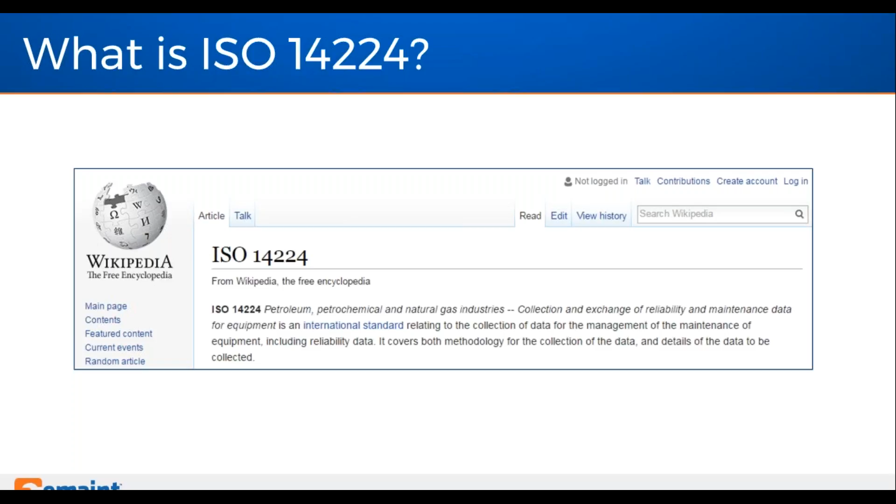The phraseology is taken from - even if we go to look at Wikipedia, we'll look at some of the terms that influence the implementation of a CMMS and the data in relation to it. So the messages even Wikipedia have to say about this: the collection and exchange of reliability and maintenance data for equipment. I'm not going to get too hung up on the fact that it came from the petrochemical and gas industries - this particular standard is most certainly applicable across all industries, particularly all industries where a CMMS comes into play and can be used.

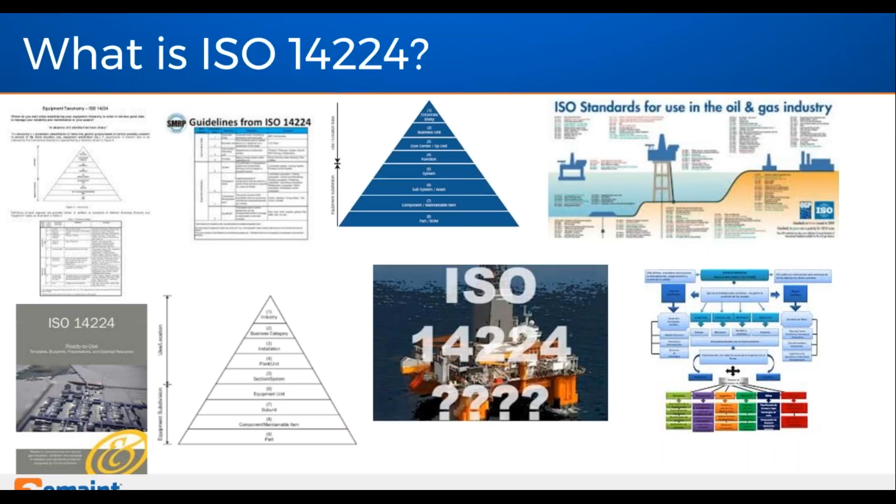A quick search in Google presents us with these sort of illustrations. You can certainly see an oil rig in the middle there, and certainly influences coming from the oil and gas industry. Also there we can see triangles - there's 3 or 4 on this particular slide. So what's with all the triangles? We'll have a little bit of a look at what the triangles mean a little bit later on in the webinar, we'll go into it in just a little bit of detail. But it's the one illustration from ISO 14224 that really assists, particularly in relation to the setup of the data.

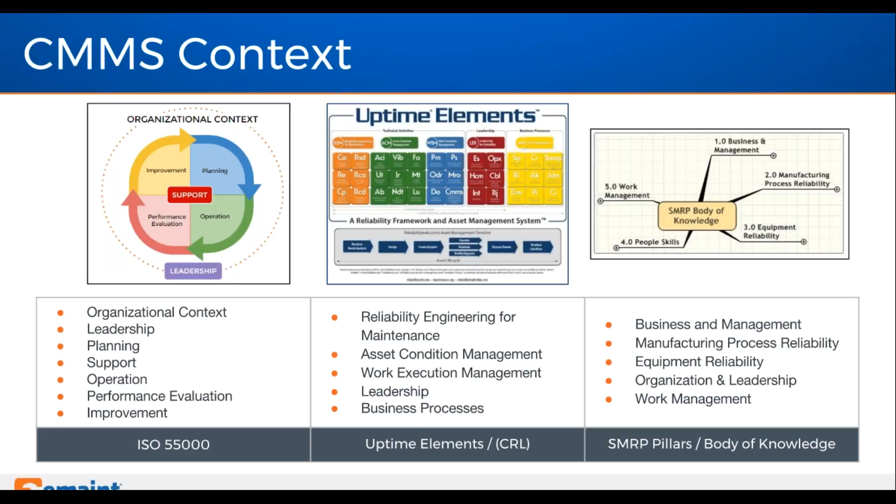Within the ISO 55000 standard, there's a clear section around asset setup. It's section 6 within the standard that specifically refers to setting up of asset information and so on, and the value of asset information. So it might be something to have a look at if you're on the ISO 55000 journey.

In relation to uptime elements, the Uptime Elements illustration has changed recently. However, what I would say is that there are numerous elements here within this particular illustration where ISO 14224 can play in. Certainly in the middle there in the blue, where we've got CMMS, that's certainly a place where ISO 14224 plays in. OpEx in the leadership space, in the green space there, the area around even vibration analysis, and in the orange there on the left-hand side, topics around root cause analysis and failure analysis are certainly areas that 14224 can play in.

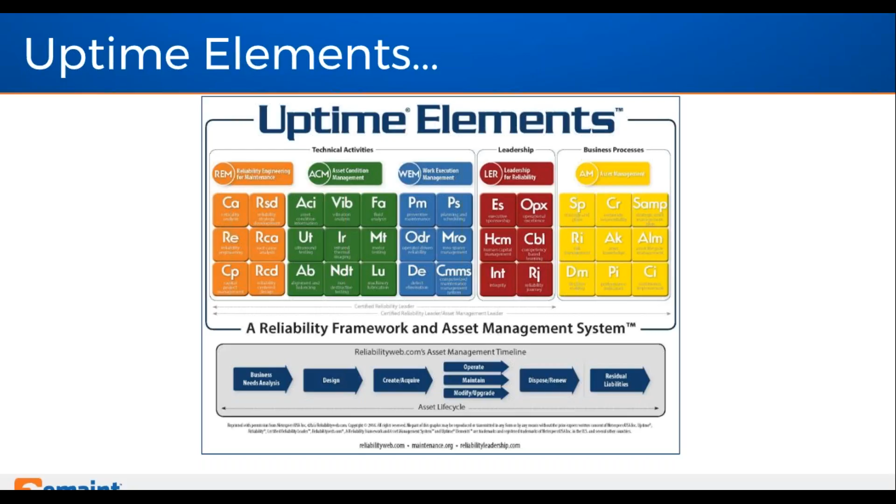Quick note on SMRP and EFNMS, the European Federation of National Maintenance Societies. So Pillar 3 in the SMRP world around equipment reliability is where the key touch point is here between SMRP and 14224. The bullet points outlined there are going to be very similar to some of the items we're going to see later on in this webinar, particularly in relation to KPIs, calculations, and reporting. So the sort of reports, the sort of KPIs we'd expect to see out of a system like eMaint and a CMMS are the sort of topics that we're going to be touching on in one of the annexes later in this webinar.

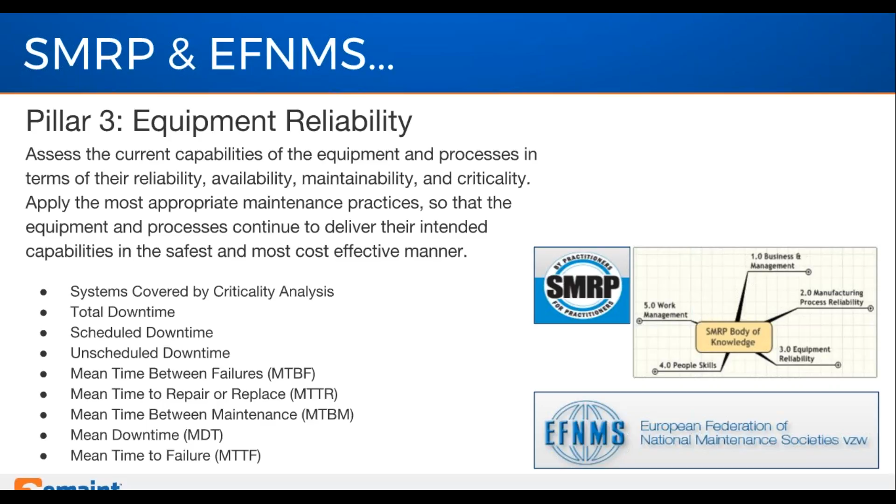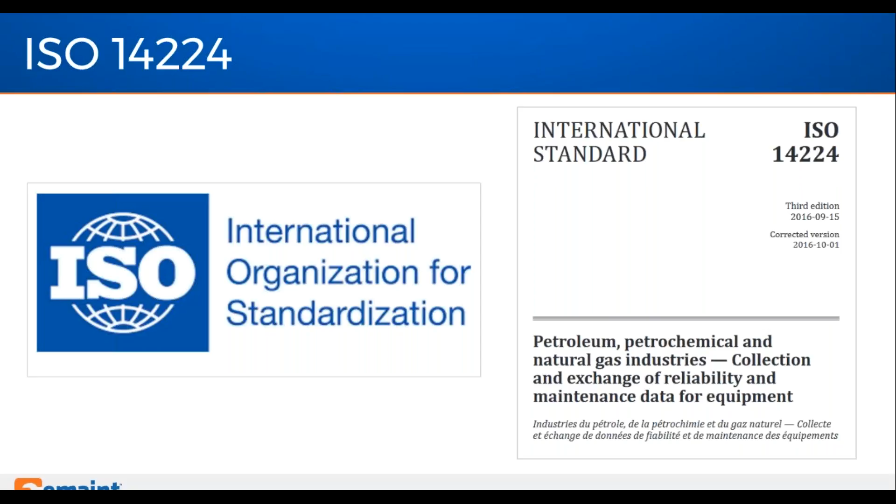So the key objectives of the standard: it's an international standard, and in the title, the collection and exchange of reliability and maintenance data for equipment. This has come from a standard that we got a hold of ourselves here, and the main point here is that it's applicable not just from the petrochemical and the gas industries. It's applicable across the board—anywhere there's a maintenance technician interacting with a CMMS, interacting with data and reliability.

The key sections of the actual standard, like most standards, I'll quickly run through them here. There's a scope up front, some references up front, key sections around terms and definitions, very useful. Similarly, the abbreviated terms section covers how the standard is applied and the benefits of reliability data and the exchange of that data.

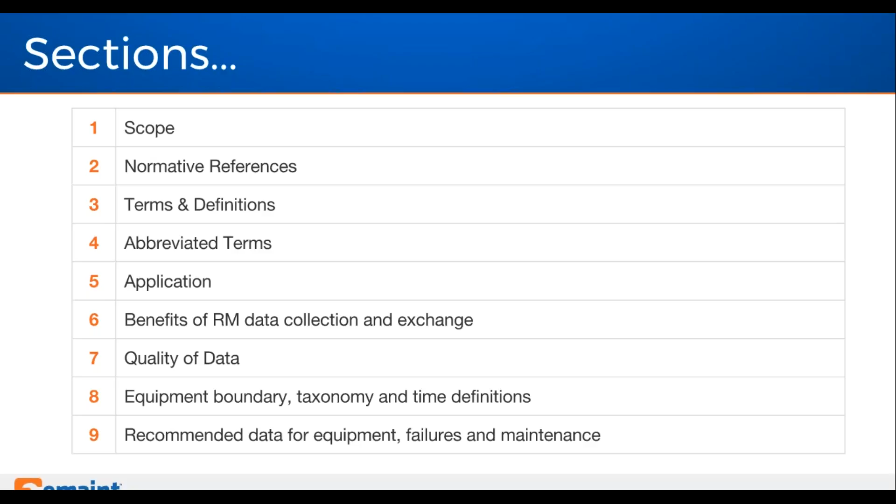Sections also on quality of data - it's a topic that is on our radar all the time. Quality data over quantity of data. Very useful sections around equipment boundaries, taxonomy, and definitions of time. We'll look at those sections in a little more detail later. And some recommendations in terms of data failure and maintenance.

As I mentioned earlier, the important pieces for me are the illustrations and the content of the various annexes within the standard. We'll look at some of them in detail - equipment classes and attributes, how we deal with failures and the maintenance parameters. We'll look at calculations and how useful they are and how there's consistency in that area. The KPIs and benchmarking and classification, particularly in relation to safety critical items too.

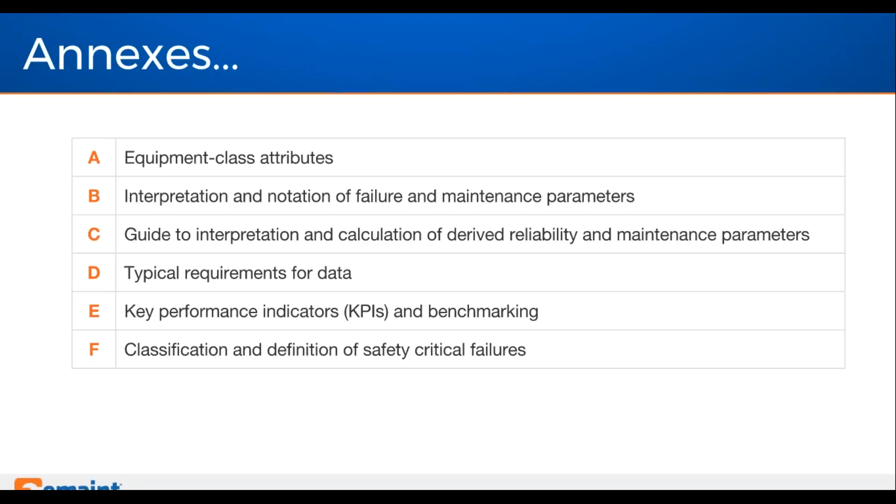The key themes that run through the standard are noted here: safety, reliability, cost. There's an emphasis on cost-effective design and maintenance, data on failures, failure mechanisms. Maintenance is important - methodologies and risk, reliability, data, the collecting of data.

Data is an investment, mentioned there second or third from the bottom. It's an investment in the success of your organization, in your facility, and in the success of your CMMS. And clarity as to the causes of failure is key to prioritizing and implementing corrective actions that result in sustainable improvements in availability, leading to improved profitability and safety.

So there are quite a few themes that run throughout the standard like that. But for me, the standardization of the data collection practices facilitates the exchange of information between relevant parties - plant owners, manufacturers, contractors, and so on throughout the world. So consistency of the data, a standardization of the data, extremely useful.

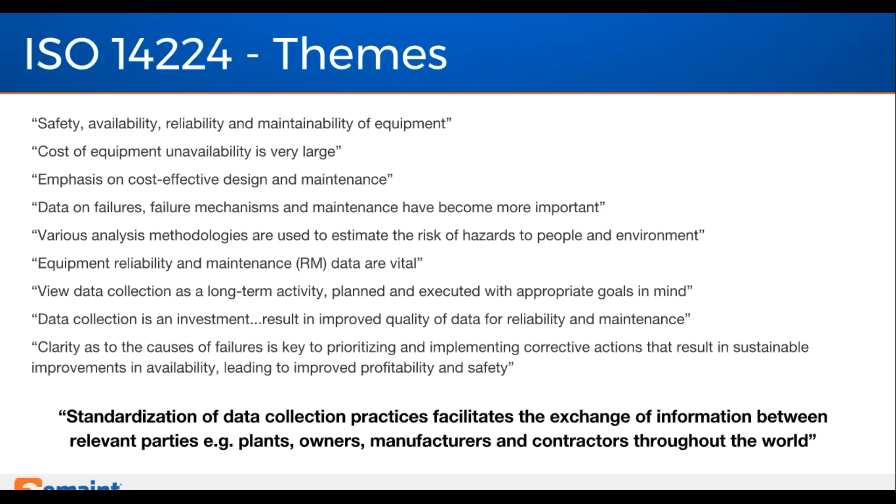What I would also say is that the standard 14224 uses a phrase called the reliability thesaurus. I like that particular term. It's such a good reference document, particularly when it comes to references and terms and phraseology that we use in our world - the world of CMMS, the world of implementing CMMS, and taking advantage of standards along the way.

Some of the items noted there in orange - it's an international standard, certainly assists as a standard format for equipment in all facilities, not just the gas and petrochemical world. Clear focus on data quality and assurance practices, and also useful in terms of the data collection practices that might come into play. We find this all of the time.

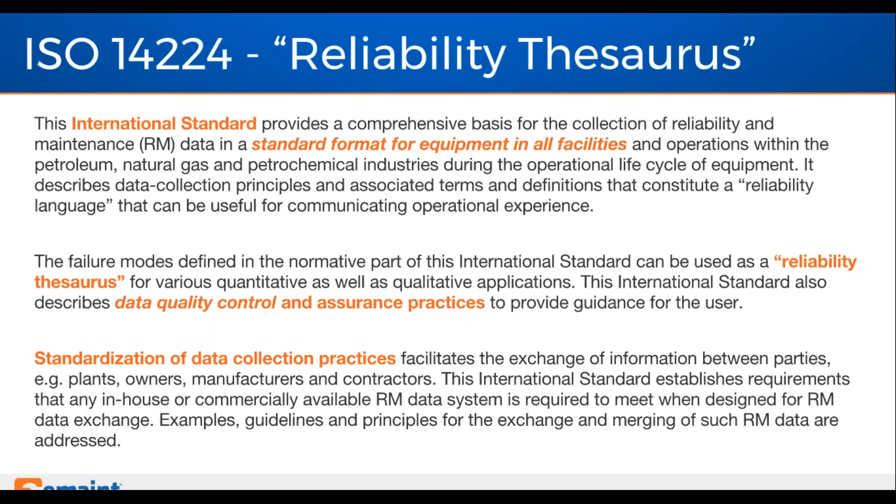One of the very first key foundation stones of a successful CMMS is the data collection phase. And standard processes in relation to that - we do our best to implement a standard process for most of our prospects and our clients.

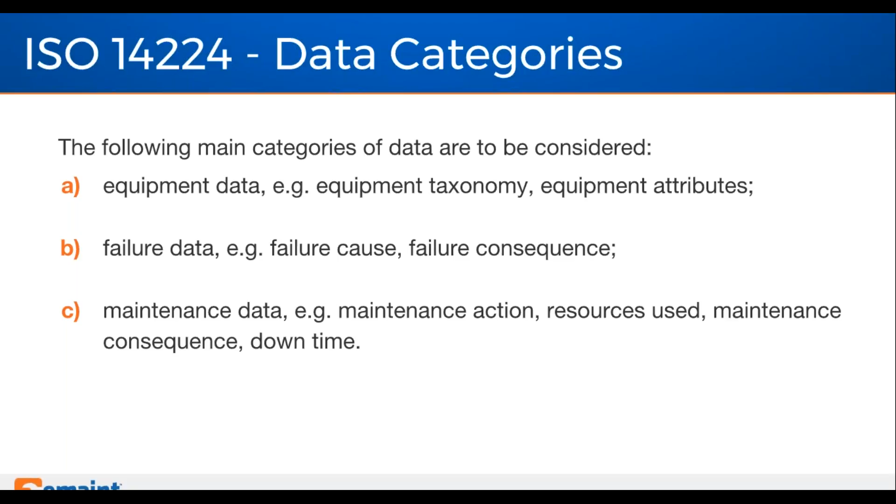Some topics within the standard around data categories - we'll have a little look at those as we go through the next few slides. But categorizing data is particularly around equipment, and there's a term there called equipment taxonomy we'll have a look at. It also looks at failure data, failure causes, failure consequences. What happens to a piece of equipment, and how can we categorize what's happening so that we can influence some decision making based on the causes of failure and the consequences of those failures.

There's a focus on data usage, focus on reliability and data used in reliability, data used in availability, data used in the terms that we use - corrective and preventive maintenance. And also a focus on safety and the environment and risk.

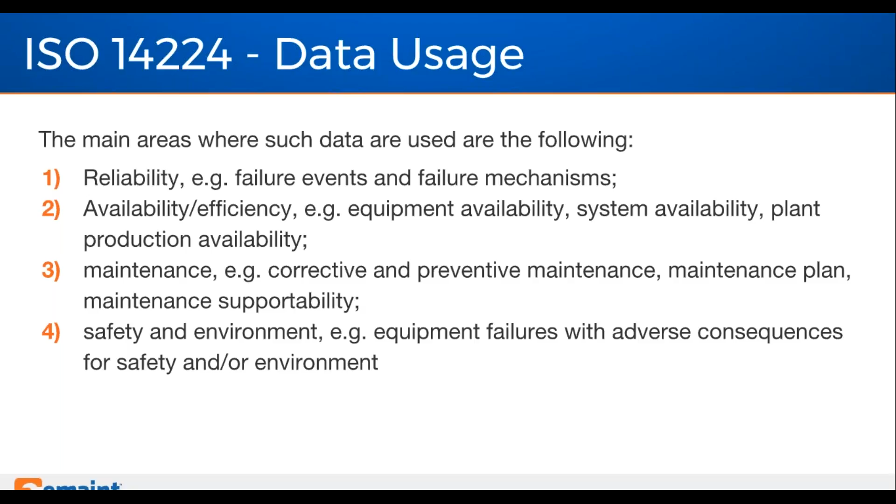Another cloud here specifically related not just to CMMS, but in this case to 14224. There are dozens, maybe hundreds of definitions in the standard that are useful - what we mean by equipment types, what we mean by a non-critical failure, what we mean by availability, what we mean by the life cycle, maybe what we mean by mean time to failure, mean time between failure. So definitions around these phrases and words that we use every day in the maintenance world, definitely very useful.

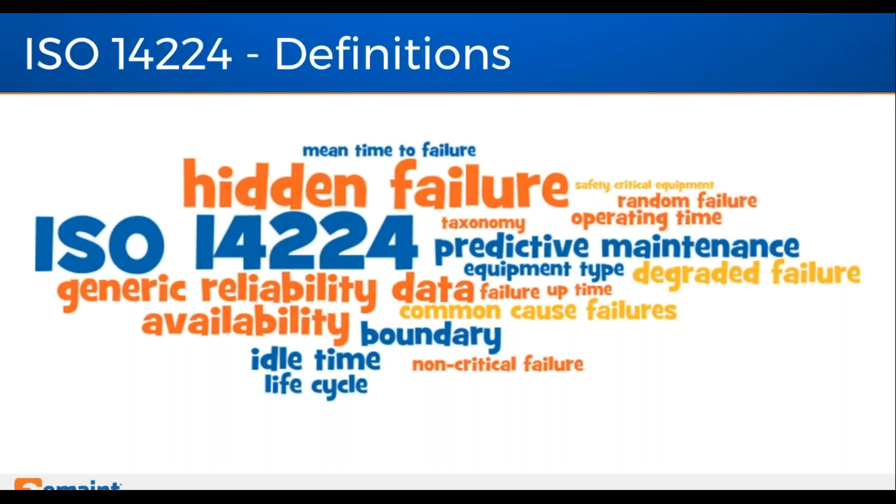So there are numerous pages in the standard that assist in describing this. So this reliability thesaurus and the common language that we want to use is certainly clearly defined in the standard.

How useful is the standard? Well, a high level list here really of where 14224 can come into play in terms of the users - those involved in the installation of plant, construction, those involved in the owning and the operating of those facilities. Industry - it's a cross-industry standard, very applicable across the board, useful for manufacturers and designers.

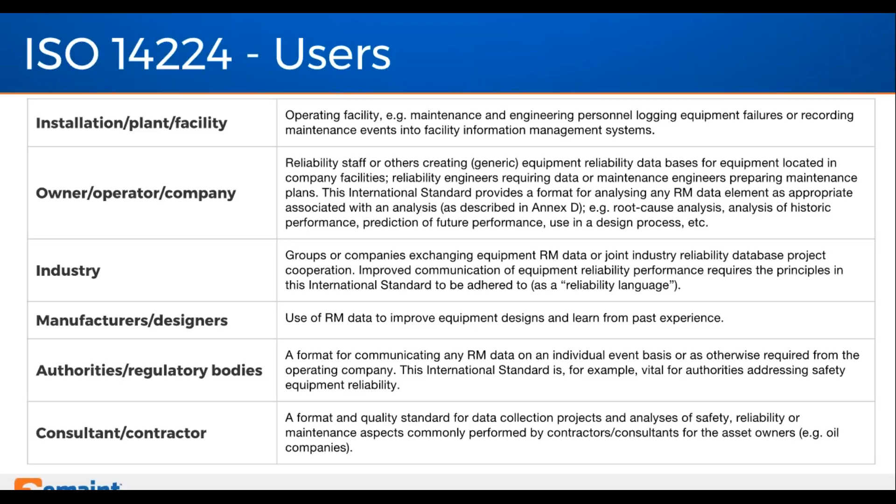You're going to see some illustrations of maybe some P&ID type illustrations as we go along here. You'll see where it comes into play for designers, particularly in the commissioning, maybe pre-construction phase of projects. Regulatory authorities and regulatory bodies find value in this as well, and contractors, consultants, folks that are involved in construction of facilities and installation ownership. So across the board, folks that interact with facilities, production, manufacturing, or otherwise - it's useful across the board.

We're going to hit a little bit later on some terms that come into play and tend to cause conflict: the topic of times, downtime, uptime, ownership of equipment when a piece of equipment is down or unavailable. There's a great document here to help us put some clarity around the different phases of downtime, which we'll look at a little later.

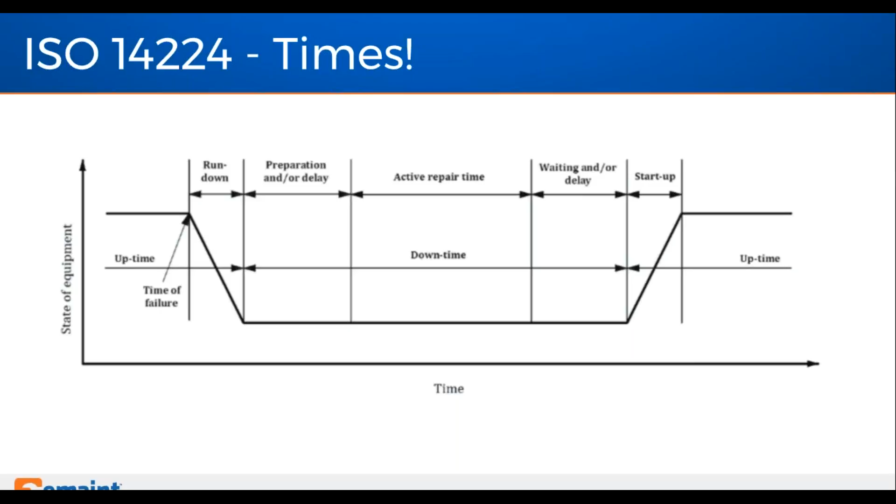So it brings us on to the topic of availability, reliability, and maintainability, which leads us to our second poll on the topic of reliability. Let me hand it back over to you, Rona, for a quick question on reliability.

We'll share the results in aggregate. Tell us, what is your biggest challenge today in your reliability journey? Is it having sufficient budget to make the improvements you'd like to make? Or is it battling with equipment downtime and understanding the causes? Or perhaps you don't currently have a method of properly collecting and analyzing data. Pick one - they might all be challenges, but maybe one is the biggest, and we'll see how you compare to the rest of our listeners today.

We have quite a few people on the line, so I'll leave this open a few more seconds to let everyone cast their vote.

Let's go ahead and share the results. It looks like 32%, or roughly a third, say budget is really a challenge in their journey, Roy. 18% say downtime is their greatest challenge. And interestingly, 50% say they don't have a method to effectively collect data, which I know is part of what you'll be talking about today and how this standard applies.

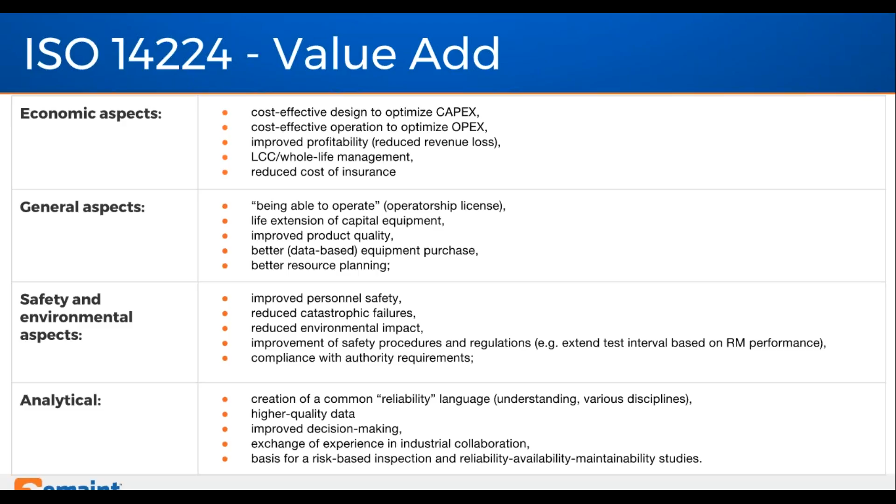Safety and environmental aspects, and analytical aspects - so across the board here, lots of areas where ISO 14224 can come into play and add value.

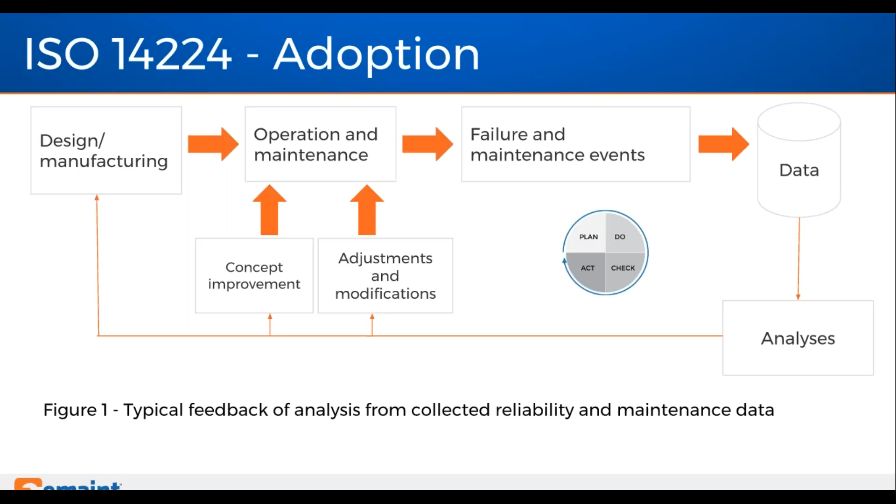And we like to use what we call the Deming model there: plan, do, check, act. That flow feeds into it, and there's no better place to capture that information than in a CMMS - so plan, do, check, act, using a CMMS within the context of the ISO 14224 adoption model.

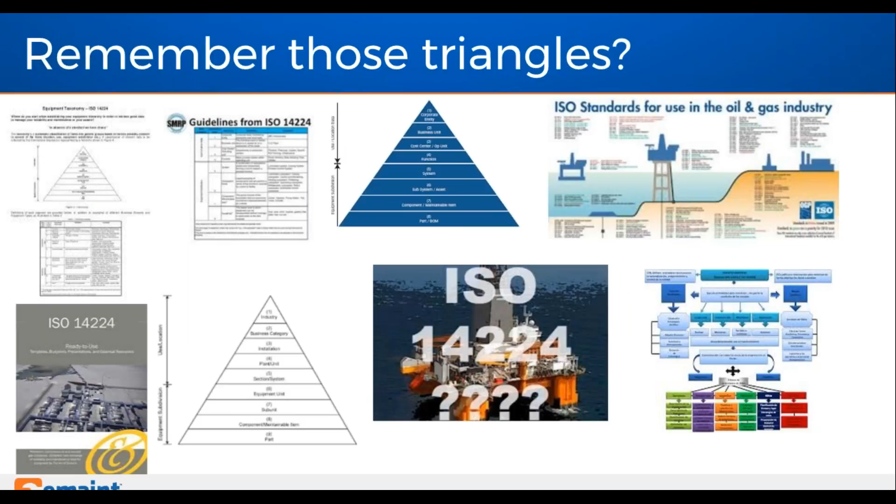Back to those triangles that we saw early on when we did the Google search. So what's that all about? Well, it's all about what we call the taxonomy. Taxonomy in relation to 14224 is really core in terms of the usefulness of the standard.

When we engage with our prospects and our customers, the topic of data setup is paramount, and in terms of quality, it's critical. In this illustration, the upper tier of this 9-tier triangle-stroke-pyramid talks about where equipment is located and the high level use of equipment. The lower tiers, levels 6, 7 and 8, talk to what we call equipment, assets, or what I like to call the maintainable item.

So we have conversations with our clients around, what do I raise a work order on? Well, a work order could be raised on any of the levels from 8 up through to 1, but primarily levels 6, 7 and 8. It's talking to the equipment subunit or equipment subdivision. Level 9, for clarity, is what we would call a part — a reusable part, a disposable part, a part held in a storeroom, or a part purchased for a work order in the repair or replacement of an asset.

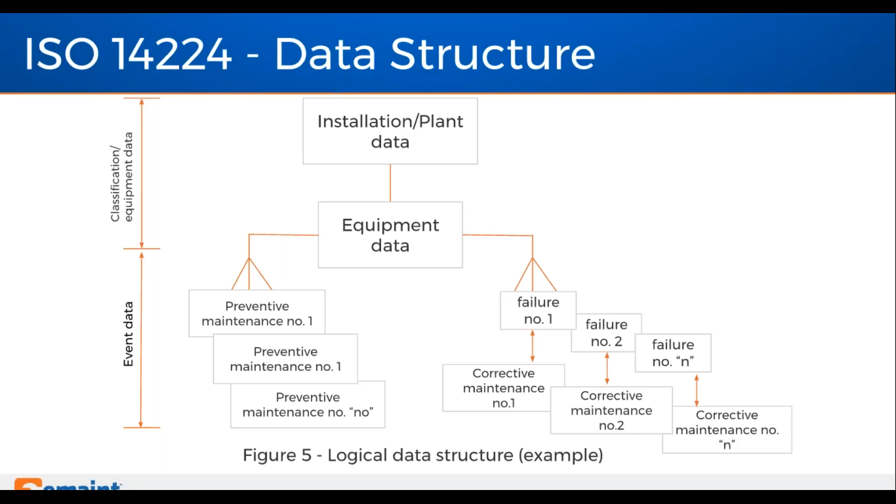Just a quick image there of what you might be familiar with in terms of a data structure. When assets are put together, we might have them put together in a hierarchy like this, but terms that come into play now are how do we deal with the asset data. We're starting to look at phrases like preventive maintenance, corrective maintenance, failures — that's what the logical data structure might look like for an organization like yourselves.

The terms that come into play in terms of our maintenance strategies are mentioned: activities before a failure, so preventive maintenance, condition-based maintenance, condition monitoring; terms that come into play after a failure, corrective maintenance, urgent, deferred, and so on. These are sort of phrases and terms starting to be seen now in 14224, giving a perspective that this is a standard for everybody, not just for the oil and gas business.

Coming in now to the annexes within the standard, which for me are very, very useful. Annex A, equipment class attributes.

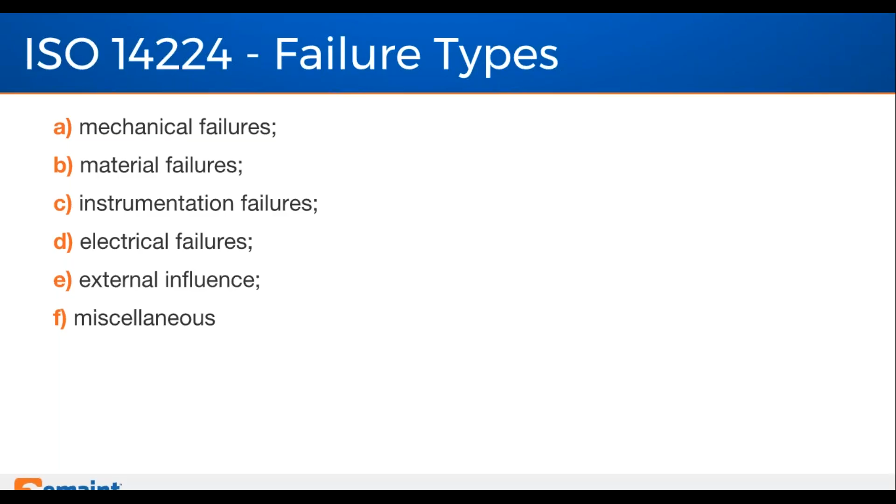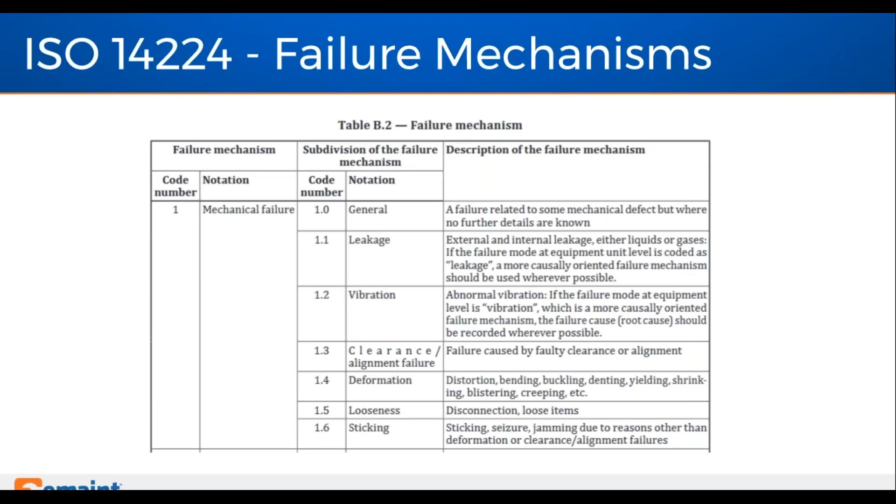Failure mechanism is what's contained in table B2. Failure mechanisms are examples outlined here. So for the various failure mechanisms, there are then subdivisions of failure mechanisms. In this illustration, we're talking about a potential mechanical failure, and then what type of mechanical failure occurred. So we've got these codes and notations for the mechanism, and then subdivisions for each of the failure mechanisms in play. Great illustrations and tables of data to help us as we're recording what issues occurred as we're processing work orders in terms of failure information.

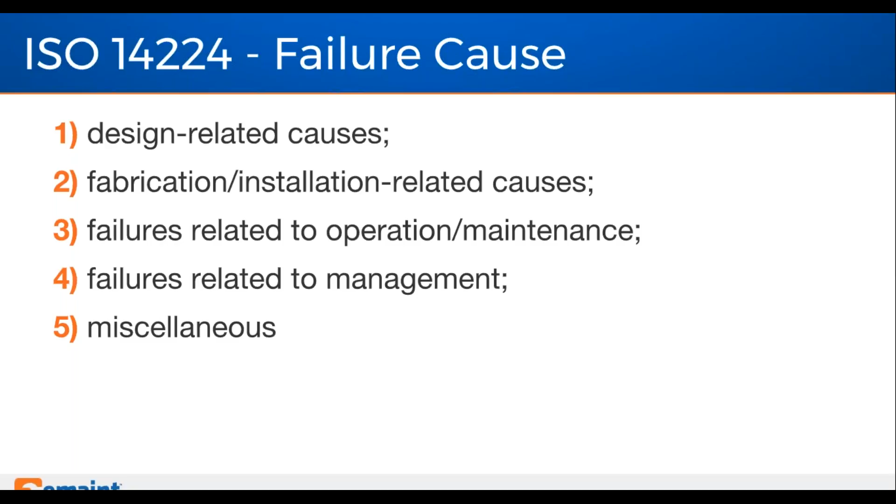Failure causes - the standard helps us here in relation to what caused the failure. So as we're capturing work during our work orders and closing out and completing work orders, we can capture failure causes. There are categorizations of failure causes noted here, presented in table B.3 within the standard. Again, some examples in terms of the notation and subdivisions of the failure causes, which can be broken down into the various subdivisions as you can see in table B.3.

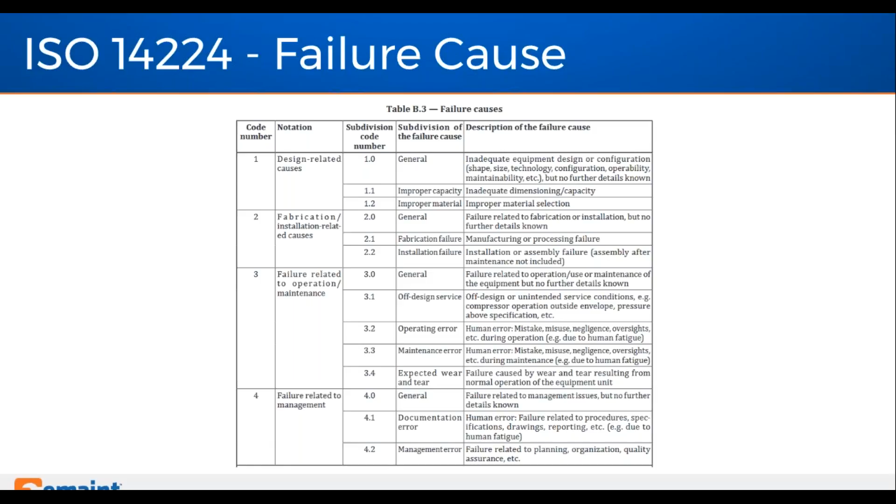Failure modes - it's an area that comes up with lots of our clients, because as we get into the business of computerized maintenance management and reliability, the topic of failure modes arises. What's the appropriate place to capture what a failure mode is? How do we know what a failure mode is? What education do we need? What referencing do we need to be able to categorize appropriately failure modes in the context of processing work orders?

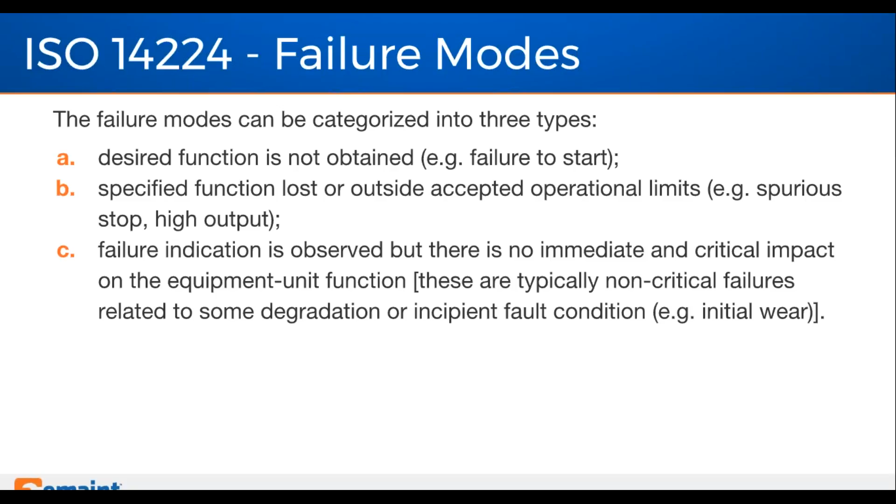In this case, there are typically failure modes associated with classes, associated with categories, and we can capture them from the failure modes tables outlined within the standard. Table B.15 is an example of the types of failure modes that could occur, and failure modes are typically going to occur against equipment types and equipment classifications. So the failure modes associated with motors are going to be different than those associated with boilers, which are going to be different than the failure modes associated with pumps. Categorizing failure modes related to the appropriate asset and equipment types is very, very useful.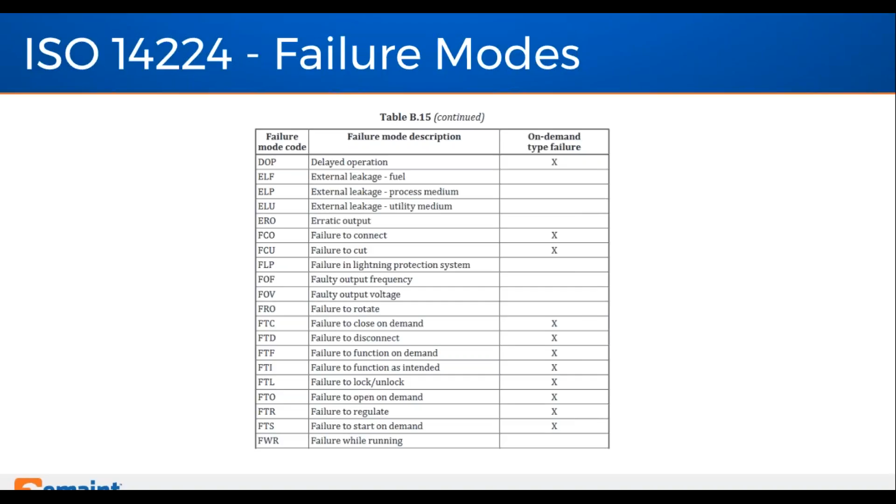Annex C, reliability and maintenance parameters. This is an area where we're looking into the mathematics behind what reliability might mean to you.

Just a quick note here directly from the standard itself. There's a whole area devoted within the standard here, Annex C, in relation to the mathematics of reliability, and here's a discussion around the mathematics of availability. As I meet customers and prospects, there's always a debate about availability and reliability. This particular annex helps to clarify and clear up any ambiguity about what availability is. And if you're interested in the mathematics of this, there's quite a substantial section in the standard that will help you here.

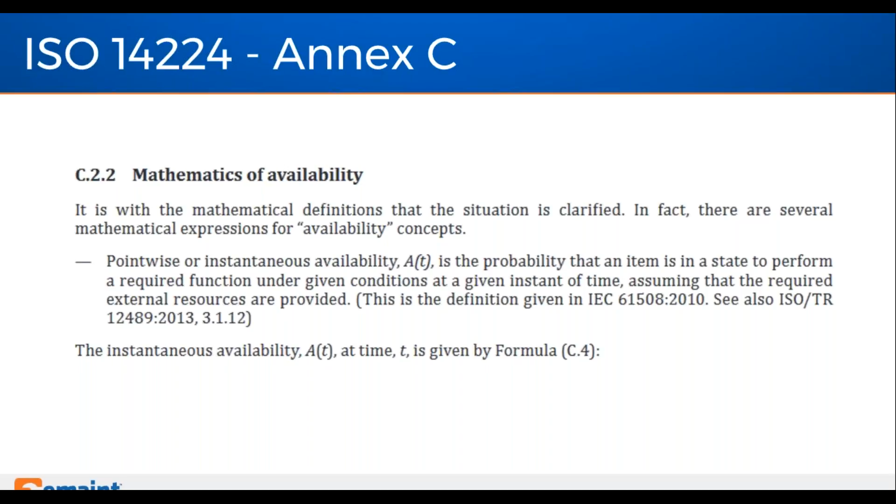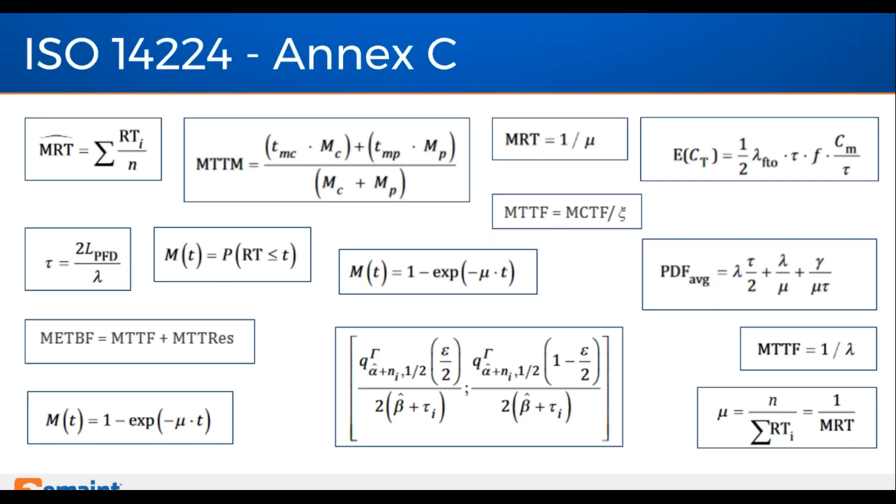As I was going through the standard myself, I started remembering my old college days when I was studying to be an engineer, and the sort of topics that came up there. I'm afraid my mathematics didn't help me too much these days. But certainly, if we're looking at putting together a formula for working out mean time between failures or mean time to repair, all of those particular formulas and calculations are available within the standard. We would then potentially use some of those calculations as we assist our clients in putting together reports and KPIs to enable information to be captured, to turn information into reports, to help improve reliability and availability in the world of maintenance within the context of our CMMS.

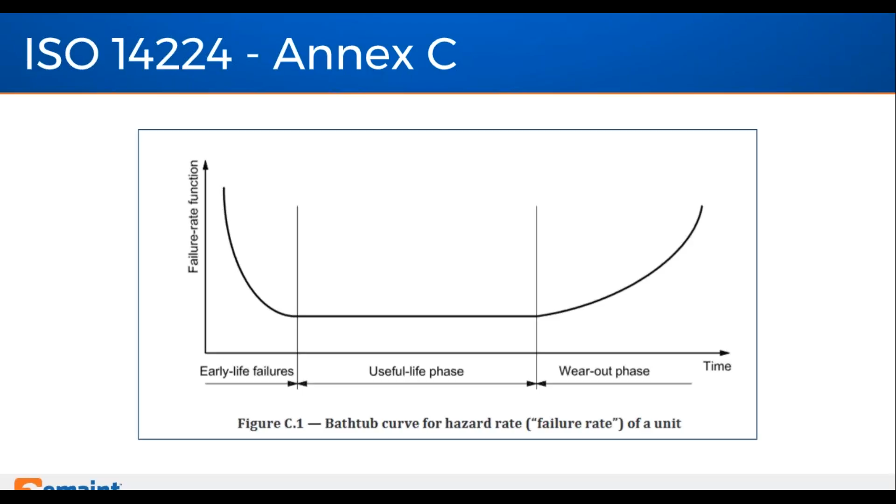The famous bathtub curve to assist us with planning strategically the maintenance activities around our assets is presented within the standard. So what does the failure rate mean? For those with experience in reliability and reliability-centered maintenance, you're going to see, I believe, 6 different bathtub or curve types within that particular strategy. Here's an example from 14224, but the point is that the calculations for assisting with what the failure rate might be are certainly used within the context of putting together calculations for the bathtub curve and any other reliability information illustrated within Annex C of 14224.

And if you want to go and use the Bayesian approach for estimating the failure rate with 0 failures, here you go. Be my guest and let me know how it goes.

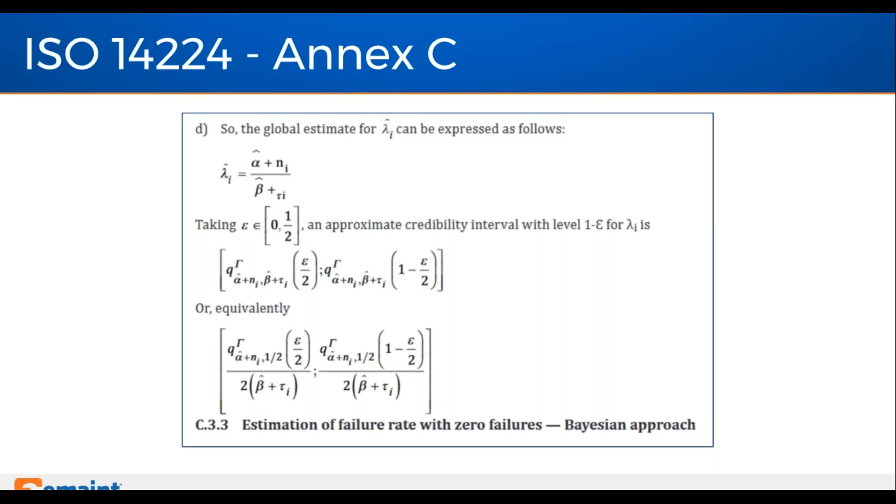From a very serious perspective though, folks, the consequences of failure as a result of a piece of equipment not being looked after or not being taken care of properly is something that comes up in our world all the time, as we're putting together the matrix of asset criticality and work order importance. To be able to get to a level of granularity so that we can say, okay, what's the most important work order to be tackling today, we find that this table here, table C2, assists greatly in that regard.

If you're familiar with Roman numerals, there's numbers here between 1 and 16, top left to the bottom right. The most important, urgent, catastrophic issues are what's categorized as number 1 there. The least important and the low maintenance cost items, minor, non-urgent operational type issues are bottom right-hand corner, number 16.

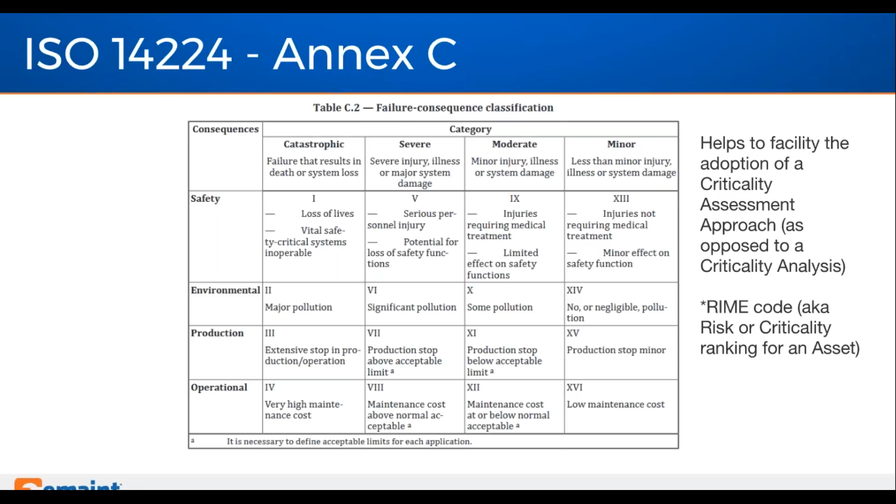So if you want assistance in prioritizing your assets and prioritizing your work orders, you won't go too far wrong by using Annex C in the standard, certainly for prioritizing work and giving you a perspective of what was done, what importance was that work, and most importantly, as reliability-centered maintenance strategies will bear this out, what were the consequences of the failure. This system here will certainly assist in that regard. Your numbers may be something like simple, like 1 to 4, or something a little bit more elaborate, like 1 to 16. But in any case, the illustration here in this table is certainly going to assist you.

Coming towards the end, KPIs and benchmarking. Every client that we interact with in terms of using a system, computerized maintenance management system, are looking to take advantage of reports from a system. What 14224 does is it helps you to understand what are the most appropriate KPIs and reports in this world of operations and maintenance and reliability.

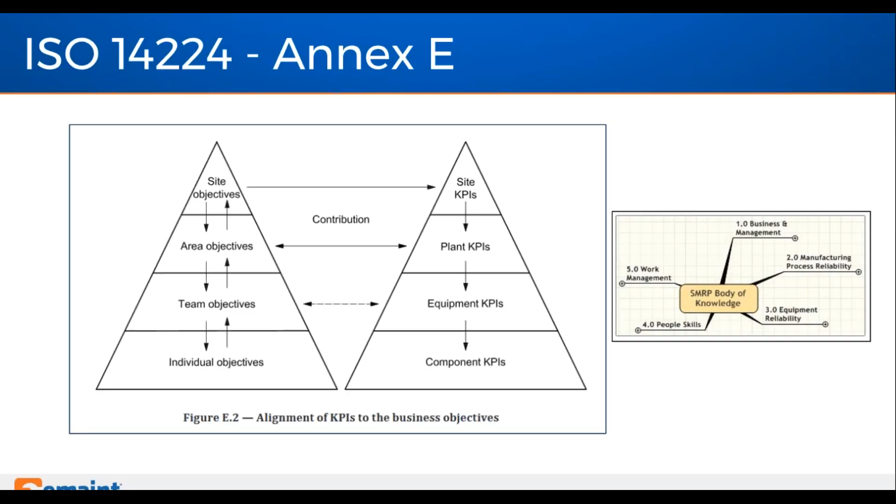So what you'll find in a system like the eMaint system, or most good CMMSs, are a suite of reports and KPIs that are going to help you to improve reliability, maintainability, manage work, manage people, manage your backlog. So Annex E in the standard is what talks to this particular topic. Also, you're going to find something similar in the SMRP pillars and the related KPIs and reports, so there's going to be a crossover in terms of what those reports look like and those KPIs. The previous version of the standard had something like 18 or 19 KPIs reports proposed and the definitions of what they were. This particular version from 2016 of the standard has 34 reports and KPIs proposed.

I've just got a couple of examples here from the standard. So the very first one up on the list is METBF, mean elapsed time between failures. It may not have made itself known in the previous edition of the standard, but certainly it's hitting the list at number 1 right now in this current version. MTTF may well be familiar to you, mean time to failure, an acronym that's been around for a while. MTBF is another one that's there.

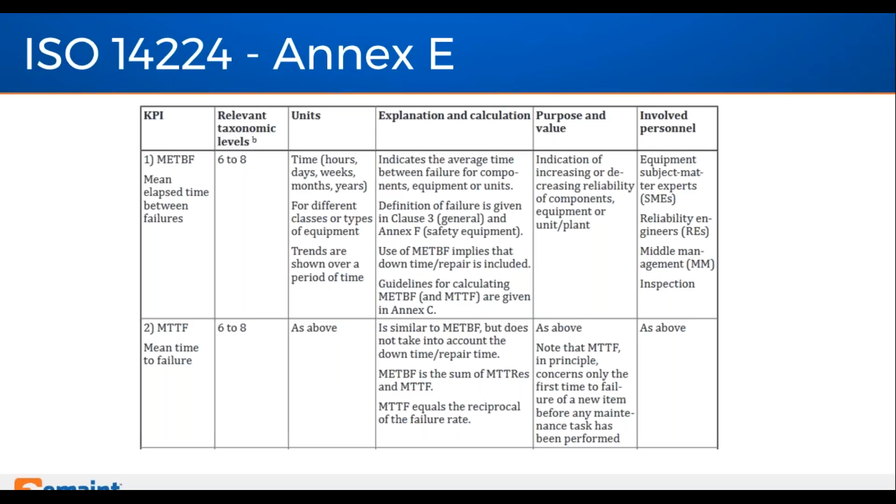So if you're looking for a definition and an explanation as to what these core KPIs are, Annex E within the standard is where it's at. There are 34 KPIs and reports described within the actual standard today. Very, very useful. Those various KPIs and reports cross the board of all of the different areas that we're interested in.

Those are the key areas, folks, within the implementation of ISO 14224, right? To bring it back to how it connects up to a CMMS, and particularly a good CMMS like the eMaint product, where does 14224 fit in?

Well, if we look back at this typical CMMS model, the environment here, the reliability thesaurus that I mentioned earlier certainly assists across here in terms of the terms that we use, the common language within the world of CMMS. It certainly assists in terms of data preparation, those triangles that were there, the taxonomy, the hierarchies, the relationship. It assists most definitely with data categorization. So they're right in center of that particular illustration at the top, when we're setting up our assets and our parts within the system, that's certainly core.

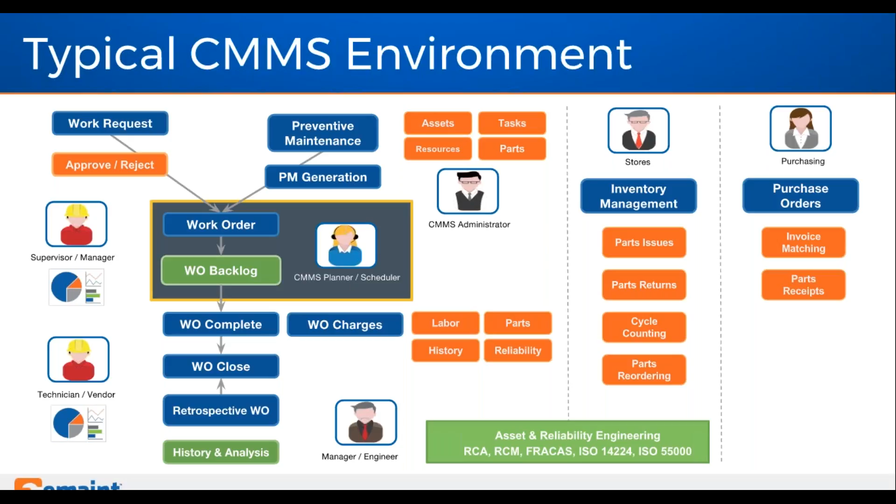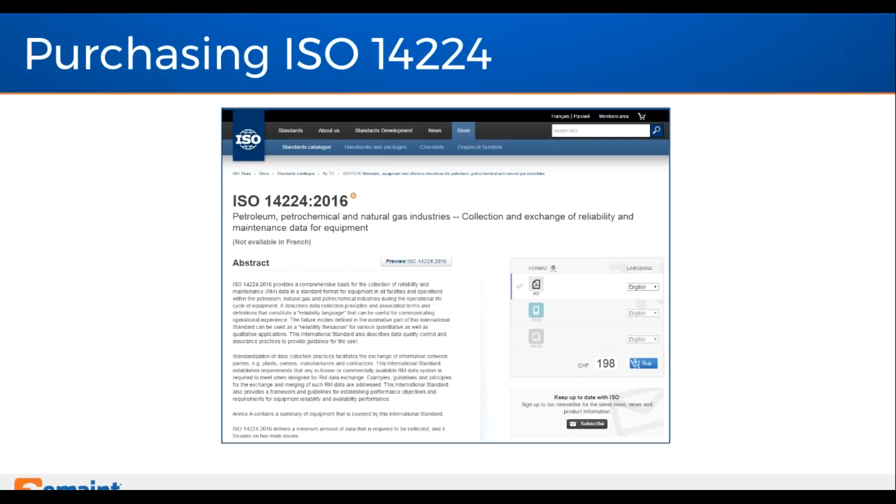Just a quick image there of the ISO 14224, that's what it looks like when you go to the ISO standards website. We're over here in Europe, it presents itself there as 198 Swiss francs. Don't worry too much about that, I'm sure your local dollar value or whatever currency you wish to purchase in will be presented to you. But what I would say is, thank you to the ISO standards for providing 14224, definitely assists in our world.

Just a quick shout out to my colleague, friend, Greg Perry, based in the US. Greg assisted me in putting this material together, and Greg talks to this particular topic day in, day out as he's interacting with our customers and our prospects. So thanks to Greg, he's an expert in this area, and thanks for his assistance in putting this material together today.

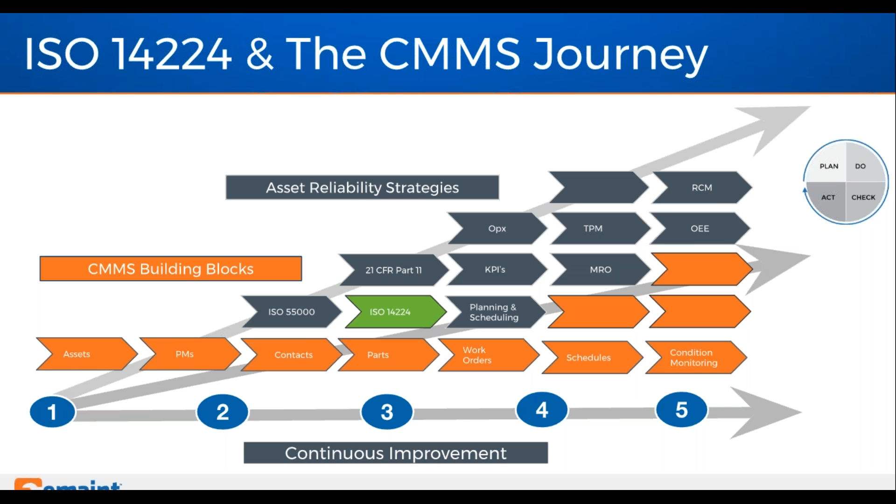One person did ask for clarification on the classification and boundaries, Roy. When you're dealing with a system where you might have to do a high-level PM, in this particular case it was a sanitation PM, that includes so many different systems, valves, pumps, etc., that all have to be done together. In your experience, what's the best way to set up that type of classification system to allow for those types of PMs that cross different systems?

But because a system like eMaint and similar CMMSs are put together in what we call relational models these days, it's not that difficult to put a connection together so that you can connect assets that may be disparate together into a group. That's what we would do within the eMaint product, and then set up PM schedules that relate to that group of assets that might otherwise be disparate and disconnected.

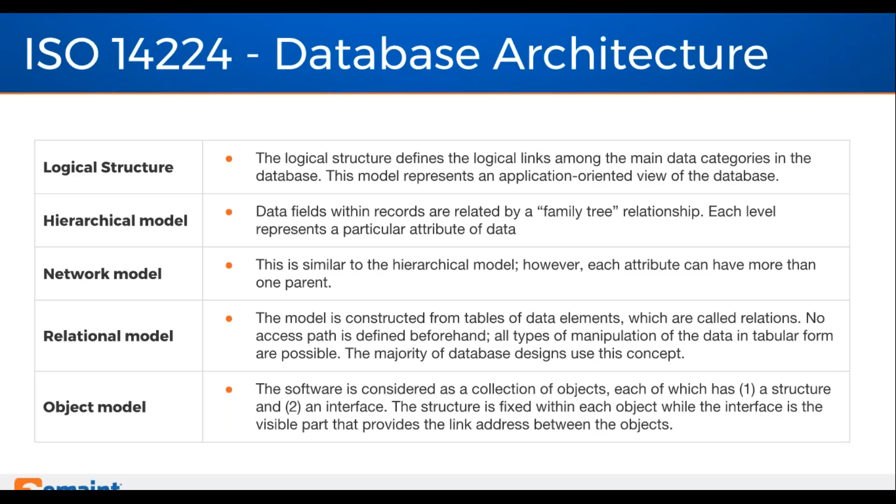Someone is also asking about how 14224 doesn't give specific direction on building your asset hierarchy using a smart numbering versus auto-generated classification system, numbering system. In your experience, do you have any rules of thumb about what system you want to use in which context?

So there are, in my experience, two rules of thumb. In terms of creating what you might call an asset number, the use of an automatically generated number can be useful. I often think of the registration number on my car - it doesn't really matter what the registration number is, except that it helps when it comes to taxing the car or insuring it or knowing who owns it. What I would also say is that if we build too much knowledge or information into the asset ID, it could become an issue if the asset happens to move.

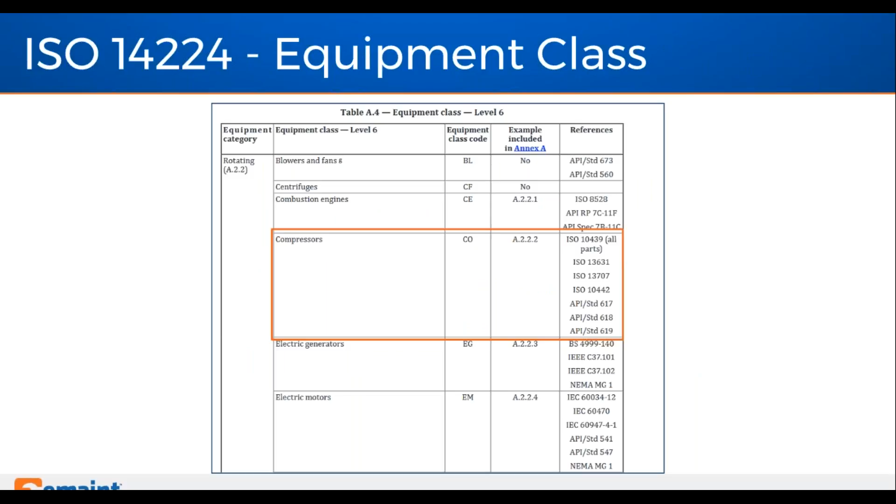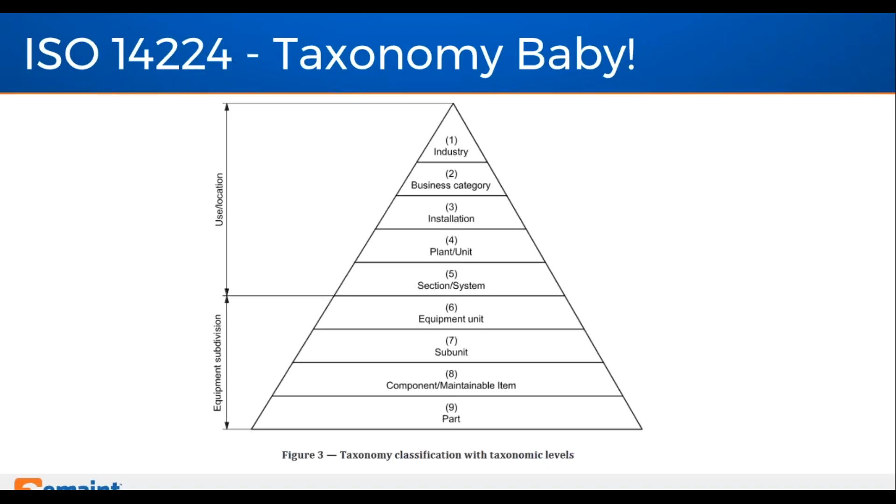So if an asset moves, be careful of including locations or additional equipment detail into the asset ID. If I go back to this Taxonomy Baby slide, just be careful of the elements that might be included in an asset ID.

I always like to guide our clients through using the combination of an equipment class or equipment type to help define the fact that it is maybe a reciprocating compressor. So maybe include the code CO and RE in addition to maybe some random number.

After that, we can then connect up PM schedules, tasks, and so on, because we now know that we're talking about compressors, and that follows through into the reliability side of the house when we're connecting up failure information and failure modes. So ultimately, with the end in mind, we're always thinking about reliability of the asset types, and that's where the connectivity between setting up assets up front and the failure information as we're processing our work orders comes into play. So we can always then join up reliability with the assets as we're setting them up.